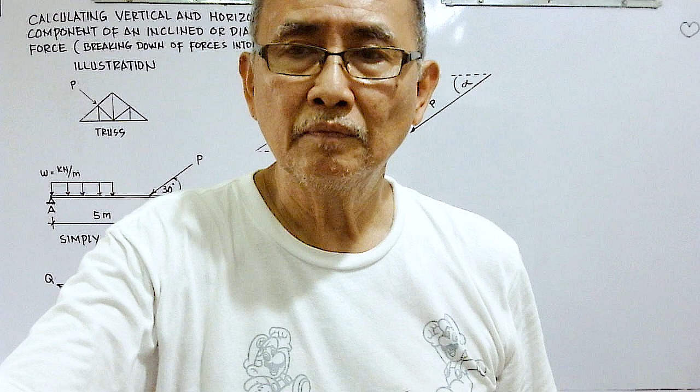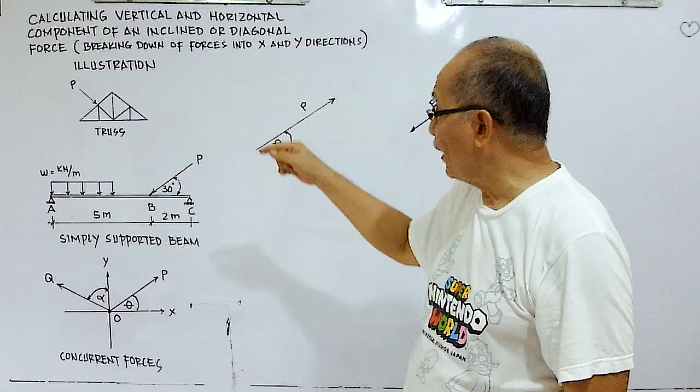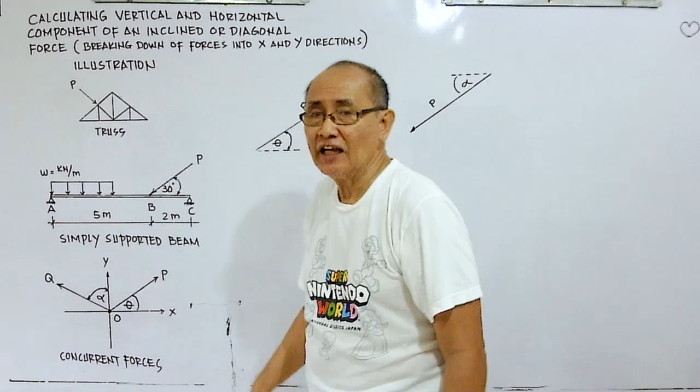Okay, now we are going to discuss calculating the vertical and horizontal components of an inclined or diagonal force. So we're going to break down the forces into X and Y direction. It is very important to break down a diagonal force into its two components.

Example, here in this illustration, you have a truss and you have a force which is perpendicular to your roof. To calculate the forces running inside these members, you have to break this diagonal force down into two components. We're going to discuss this one later on.

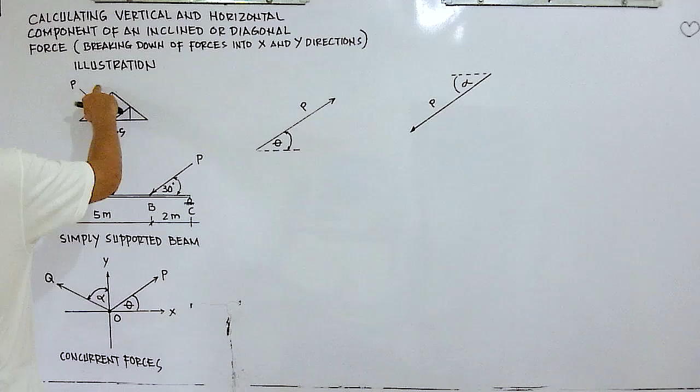Also, if you have a simply supported beam, here you have a uniform load, and here you have a diagonal force or a point load on the other side. To calculate this, you have to modify it into its vertical and horizontal component to calculate the moment on point A or point B. Later on, we're going to discuss how to break this down into two components.

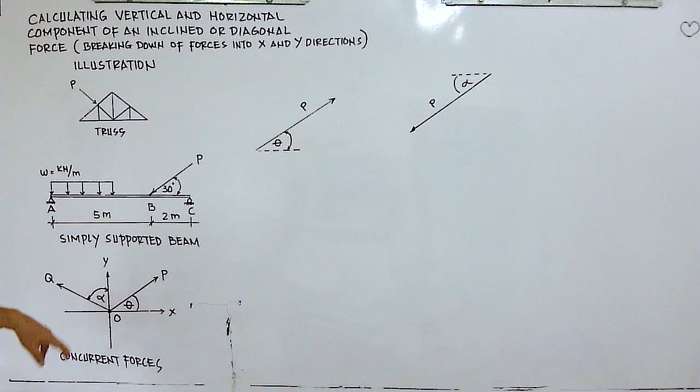And also here, we have concurrent forces intersecting at a single point O. To find the forces acting along the x-axis, you have to break this down also into its y and x component. And this one also, to find the forces running along the x and y axis, you have to break this down into its y and x component.

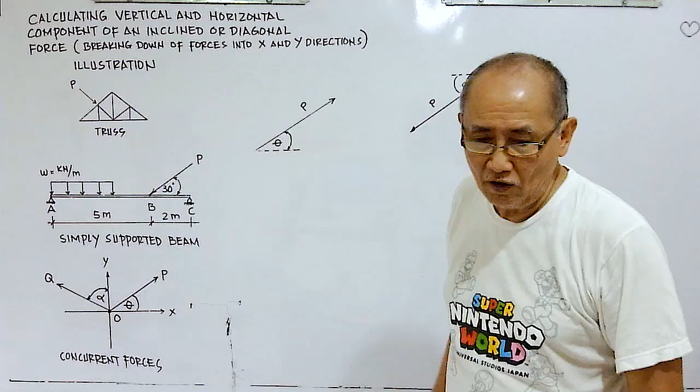Now, how are you going to break down a diagonal force? Assuming here we have a diagonal force, let's say like this. We have a diagonal force of P, like that. Diagonal force. And we're going to break this down into two components.

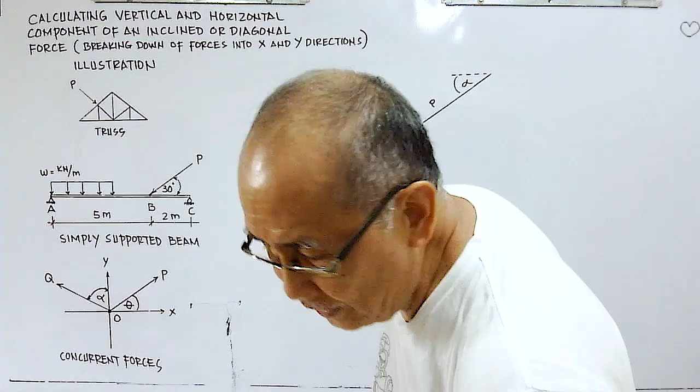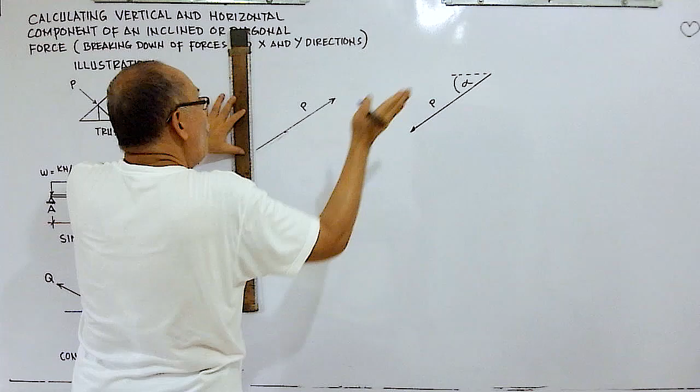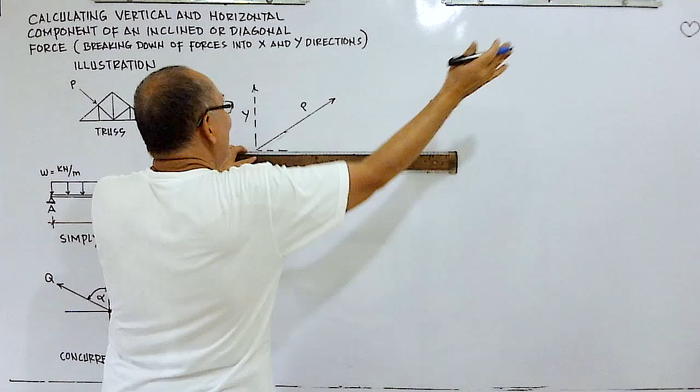There are two ways to break this down. The other one is you can break this down this way. This is inclined, going to the right, going upward to the right. So your vertical component will be like this - there, your vertical component. And your horizontal component will be like this. Because this is going upward to the right, your horizontal component will also be going to the right, like this. Now, if you have an angle here, say this inclined force is theta from the horizontal.

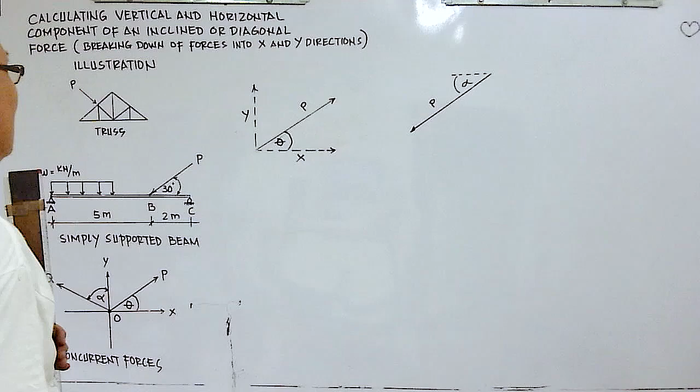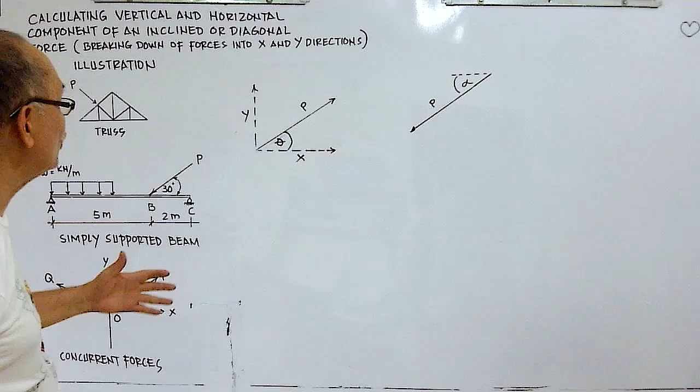There, theta from the horizontal. It is very hard to solve this vertical component and the horizontal component this way. So the better thing to do, the best thing to do, is to break this diagonal force down this other way.

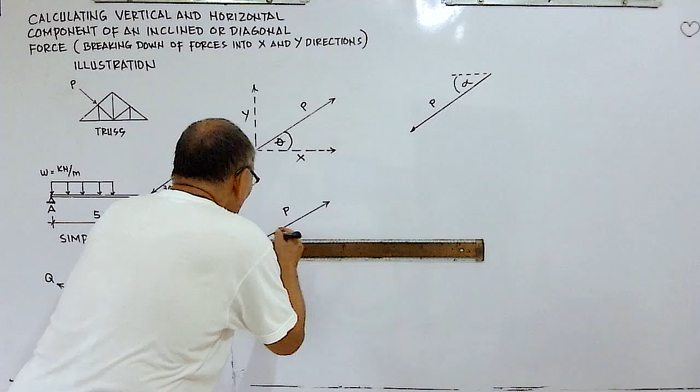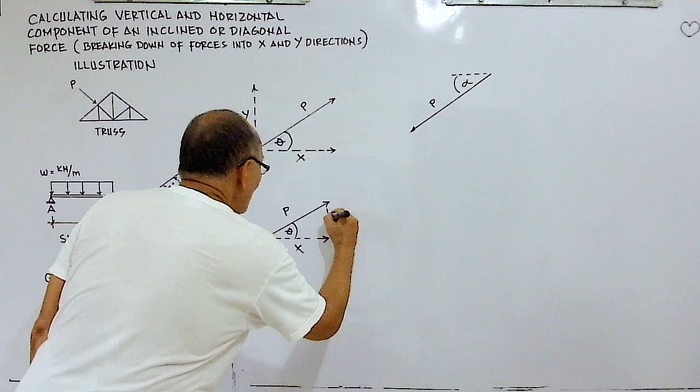This is P, and it is going up to the right. So my horizontal force will also be going to the right. And my upward force, my y component, will be going this way. There, that is a better way of breaking down your components. You create a triangle.

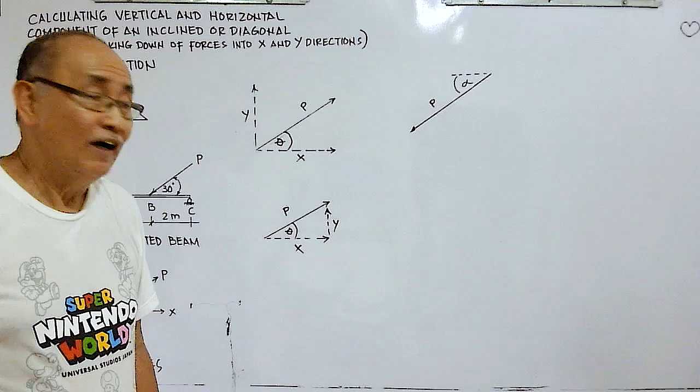Say here, if you have a force P going down from the horizontal, with an angle alpha. If you're going to break this down this way, the other component will be your y, because this is going downward, so your y component will also be going down. And this is going to the left, so your x component will also be going to the left - that will be your x component. You can break it down this way, but it is very hard to compute.

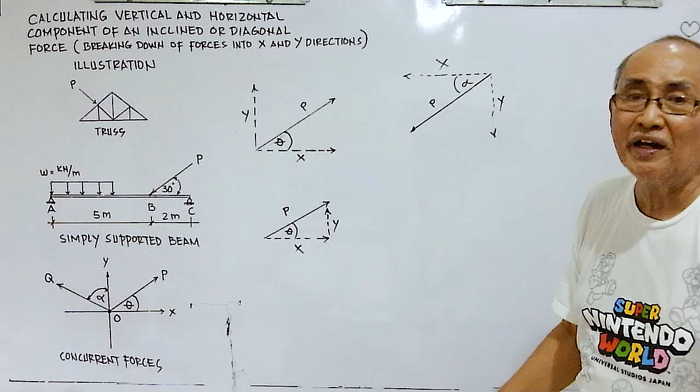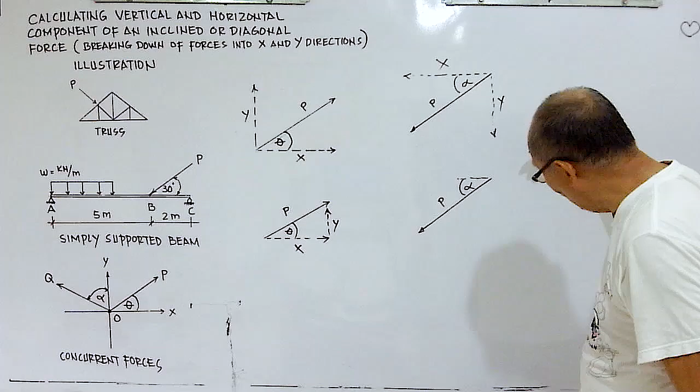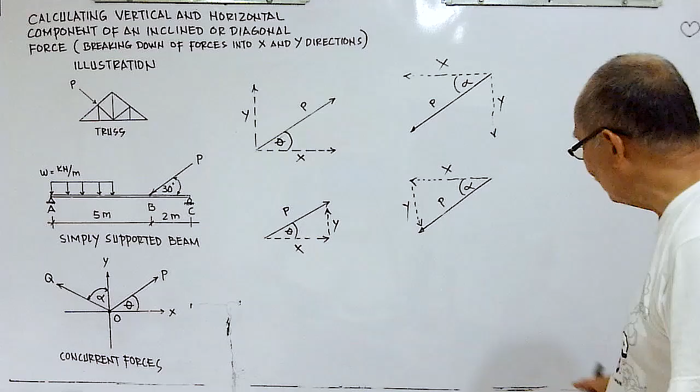Better still, make it like this. This is your P. Then, this is your alpha. So, this is going down to the left, so my horizontal force will also be going to the left, like this. And this is going down, so my y component will also be going down. There you go - it is better to break it down this way. So, you create a triangle. Now, I will show you the importance of this kind of breaking down.